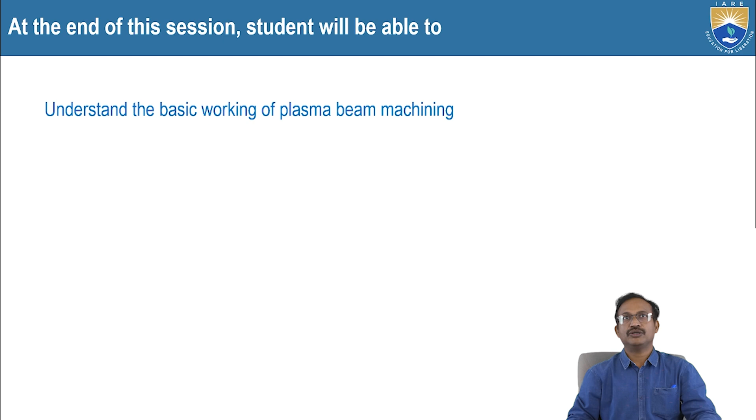Non-traditional machining processes have three branches under which there are different machining processes: the first one is mechanical, second is thermal, and third is chemical and electrochemical.

Under mechanical: ultrasonic machining, water jet machining, abrasive water jet machining, ice jet machining. Under chemical and electrochemical: chemical milling, photochemical milling, electrochemical milling.

Under thermal: electro discharge machining, electron beam machining, laser beam machining, ion beam machining, plasma beam machining.

Now we are in plasma beam machining.

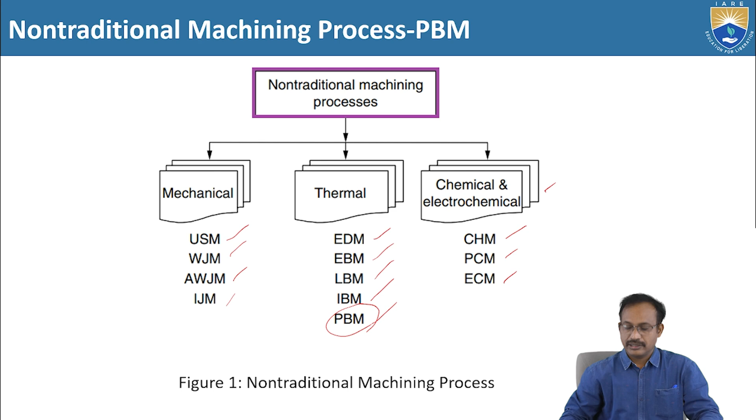Introduction to plasma beam machining. When the temperature of a gas is raised to about 2000 degrees centigrade, the gas molecules become dissociated into separate atoms. At higher temperatures, around 30,000 degrees centigrade, these atoms become ionized.

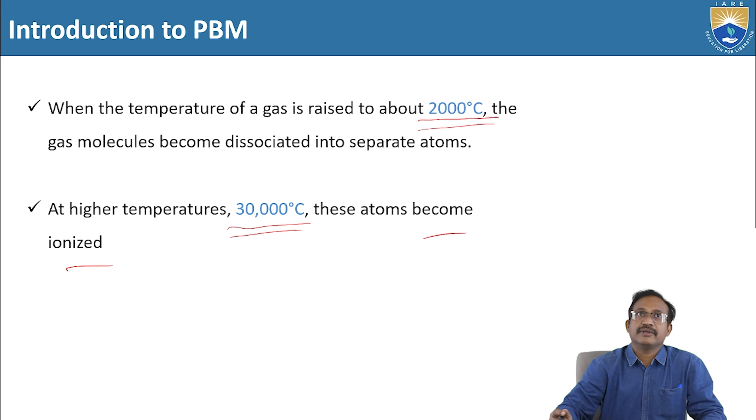The gas in this stage is termed plasma. So at 30,000 degrees centigrade, the gas molecules or atoms convert into ionization, and that is said to be plasma.

Machining by plasma was adopted in the early 1950s as an alternative method for oxy-gas flame cutting of materials like stainless steel, aluminium, and other non-ferrous metals.

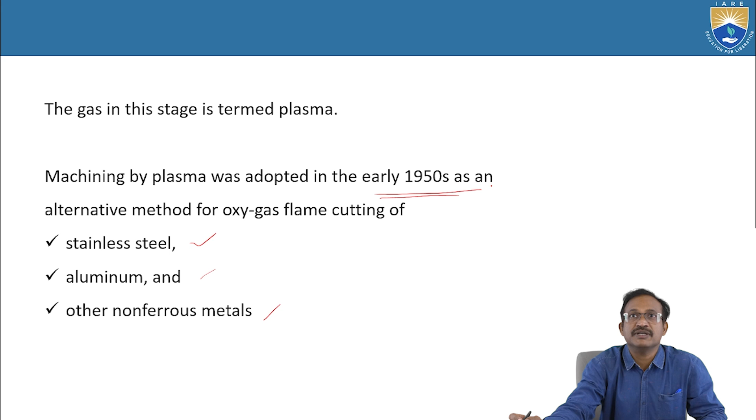During that time, the process limitations were low cutting speed, poor machining quality, and unreliable equipment.

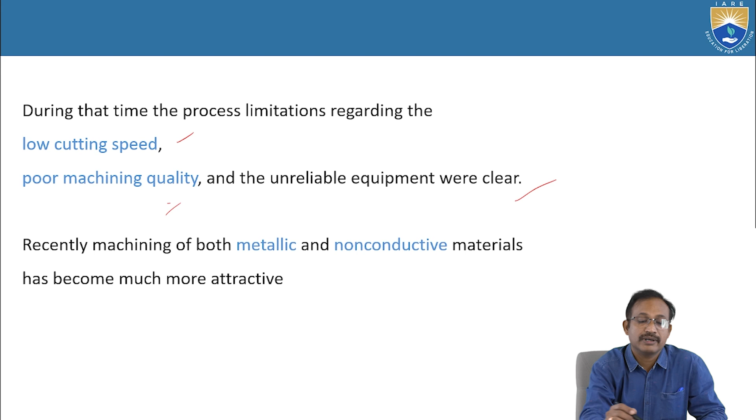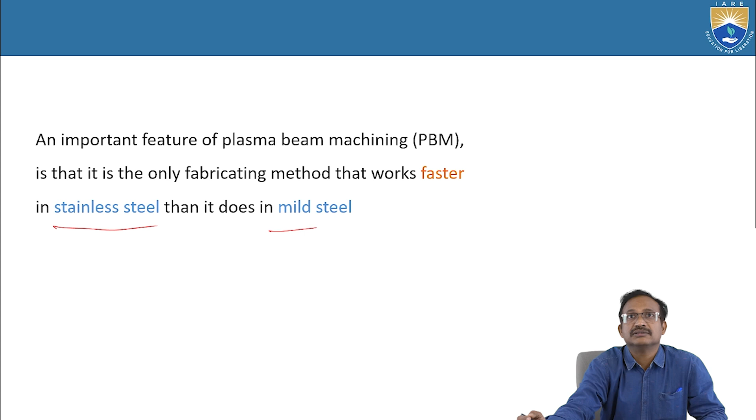Recently, machining of both metallic and non-conductive materials has become much more attractive. An important feature of plasma beam machining is that it is the only fabricating method that works faster in stainless steel than it does in mild steel.

Introduction to machining systems. In plasma machining, a continuous arc is generated between a hot tungsten cathode and the water-cooled copper anode.

A gas is introduced around the cathode and flows through the anode. The temperature in the narrow orifice around the cathode reaches 28,000 degrees centigrade, which is enough to produce a high temperature plasma arc.

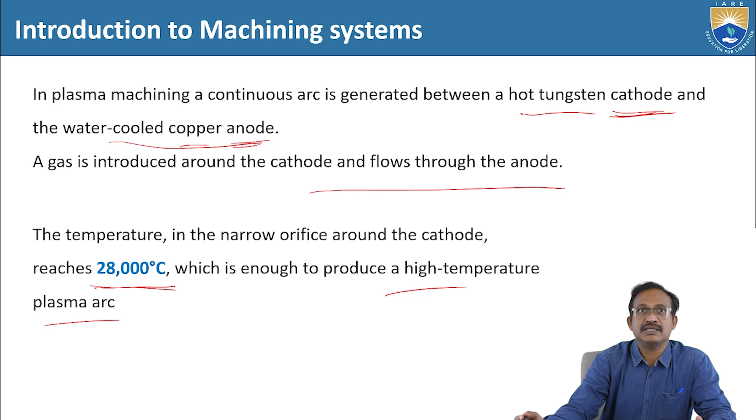This content about the operating temperature is very important. Here, the cathode material is tungsten and the anode material is copper - these two are the important elements in this plasma beam machining system.

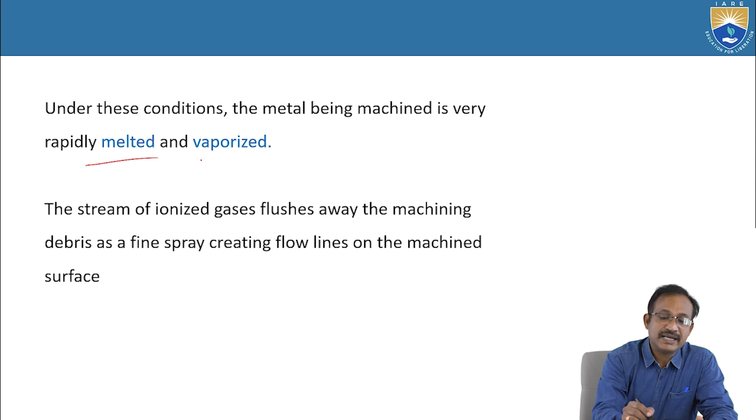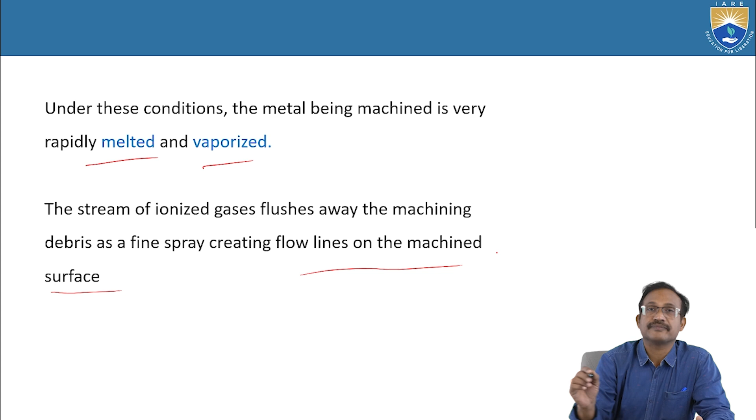Under these conditions, the metal being machined is very rapidly melted and vaporized - so the phenomena of material removal here is melting and vaporization. The stream of ionized gases flushes away the machining debris as a fine spray, creating flow lines on the machined surface.

Plasma beam machining characteristics: the removal rates by this method are substantially higher than those of conventional single point turning operations. Now let us look at these characteristics of plasma beam machining.

Parameters and levels: velocity of plasma jet is 500 meters per second. Material removal rate is 150 cubic centimeters per minute. Specific energy is 100 watts per cubic centimeter per minute. Power range is 2 to 200 kilowatts.

Voltage is 30 to 250 volts. Current up to 600 amperes. Machining speed is 0.1 to 7.5 meters per minute. Maximum plate thickness is 200 millimeters.

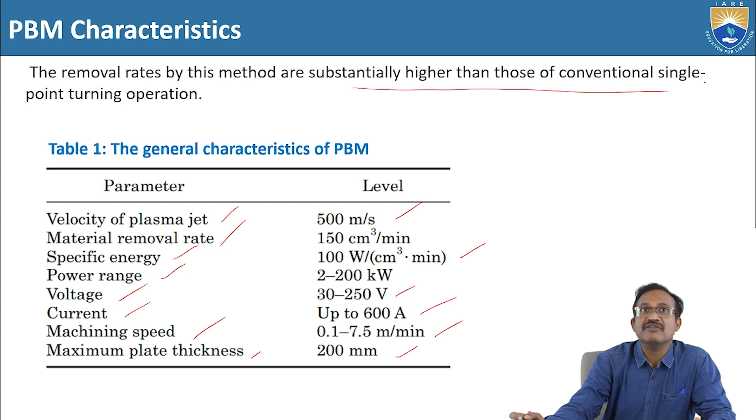So the removal rates by this method are substantially higher than those of conventional single point turning operations.

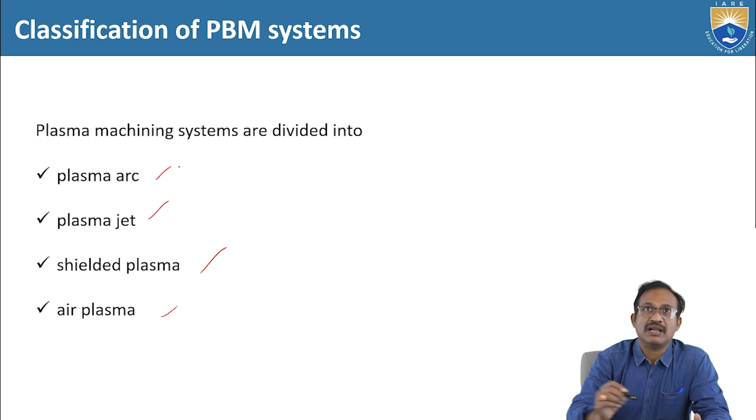Classification of plasma beam machining systems: plasma machining systems are divided into plasma arc, plasma jet, shielded plasma, and air plasma.

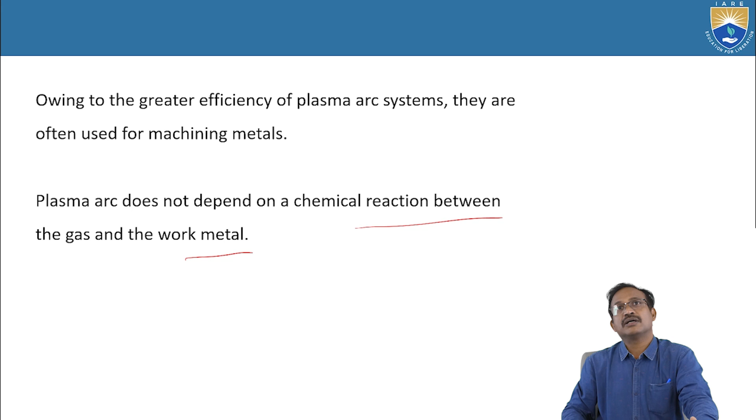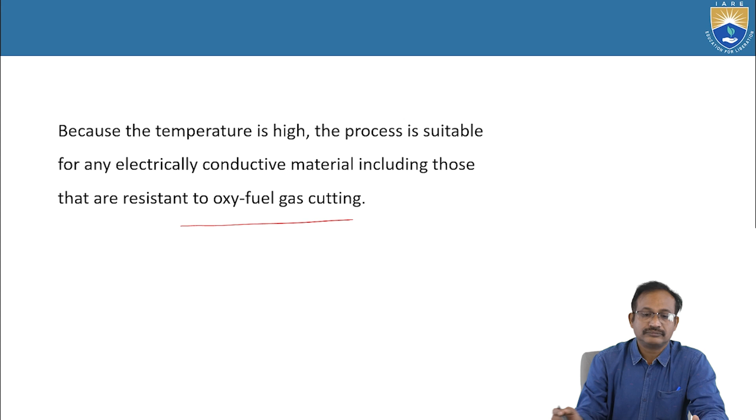Owing to the greater efficiency of plasma arc systems, they are often used for machining metals. Plasma arc does not depend on a chemical reaction between the gas and the work metal, because the temperature is so high. The process is suitable for any electrically conductive material, including those resistant to oxy-fuel gas cutting.

Now the second system is plasma jet. In this system, shown in figure 3, the non-transferred arc operates within the torch itself.

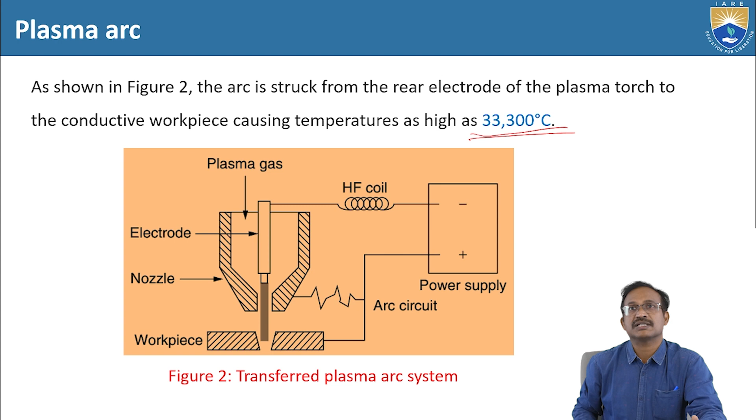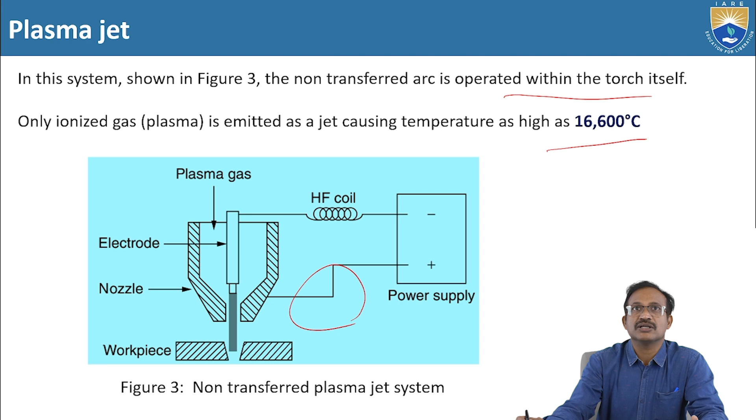Only ionized gas, that is plasma, is emitted as a jet causing temperatures as high as 16,600 degrees centigrade. The difference here is that we do not have the arc circuit connected to the workpiece like in plasma arc setup. That is eliminated. Directly it is connected to the setup. That is the only difference.

Since the torch itself is the anode, a large part of the anode heat is extracted by the cooling water and is not effectively used in the material removal process.

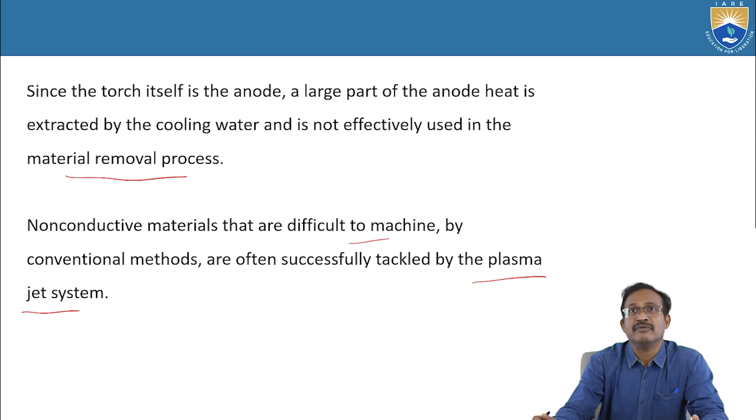Non-conductive materials that are difficult to machine by conventional methods are often successfully tackled by the plasma jet system, since usually non-conductive materials are very difficult to machine.

Next, shielded plasma. In this, gas shielded plasma and water shielded plasma are the two types.

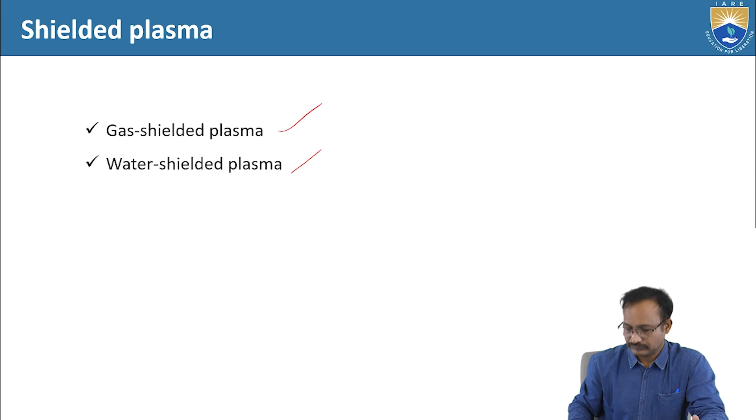Now let us discuss gas shielded plasma. When machining different materials such as aluminum, stainless steel, mild steel, assisting gases may have to be used in order to produce cuts of acceptable quality. In such a case, an outer shield of gas is added around the nozzle to reduce the effect of the atmosphere on the machining gas, usually nitrogen or argon.

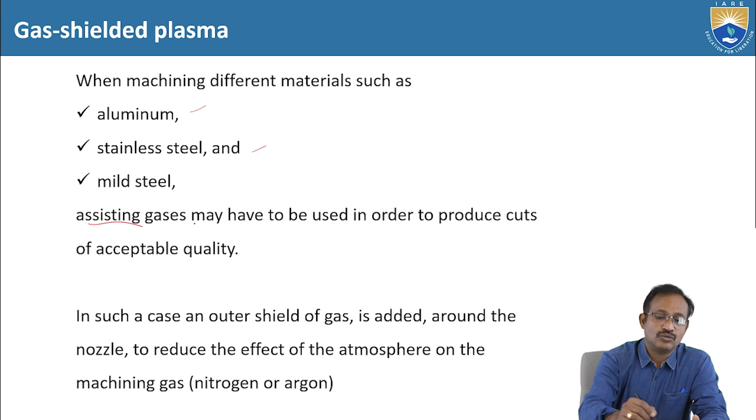The shielding gas depends on the metal being machined. Based on the metal itself, we have to choose the shielding gas.

For stainless steel, aluminum, and other non-ferrous metals, hydrogen is often used as a shielding gas.

CO2, carbon dioxide, is popular for ferrous and non-ferrous metals.

For mild steels, air or oxygen may be used. So for mild steel, we can go with free air or oxygen, but for stainless steel, hydrogen, and for ferrous and non-ferrous metals, carbon dioxide.

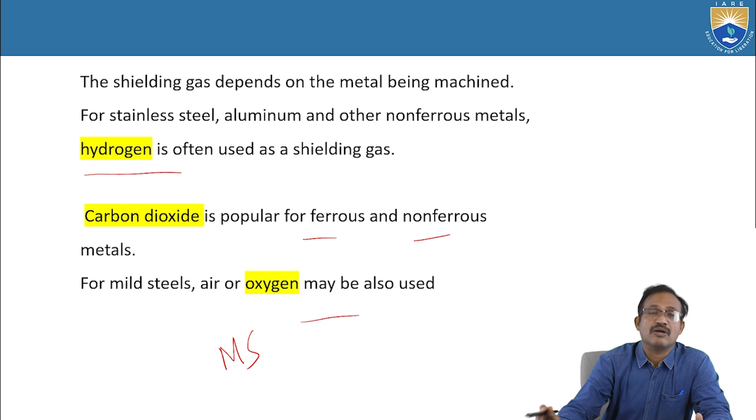Water shielded plasma. In figure 4, nitrogen is used for machining while the shielding gas is replaced by water.

Water forms a radial jacket around the plasma torch. Let us go through the water shielded plasma figure here: anode workpiece, scrap side, used side, plasma torch, water curtain circulated around the jacket, water supply, and the plasma gas passing through these nozzles.

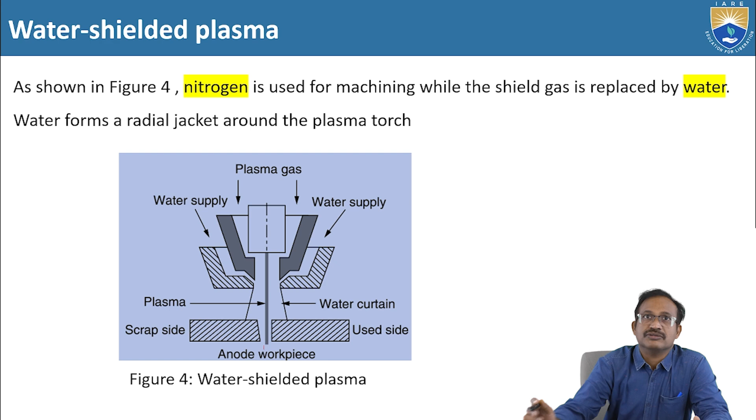The cooling effect of water is reported to reduce the width of the cutting zone and improve the quality of cut. So here cooling of water plays a predominant role in the quality of the machining.

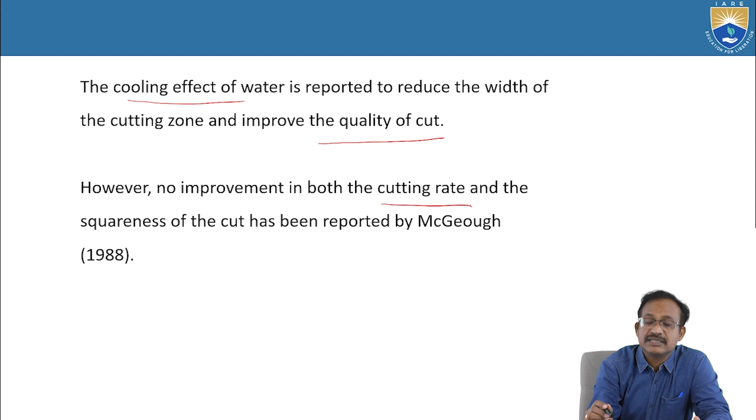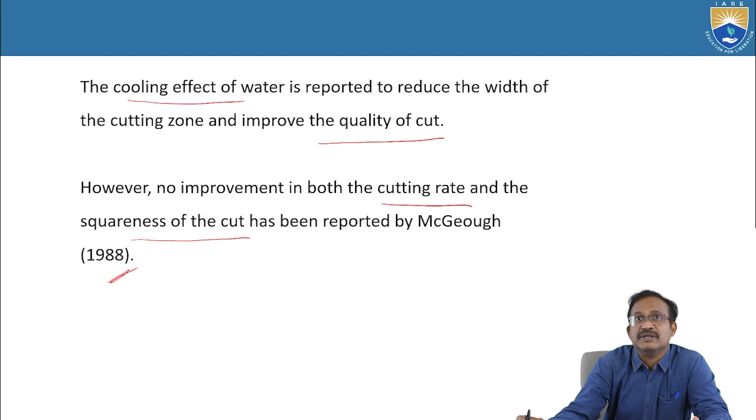However, no improvement in both the cutting rate and the squareness of the cut has been reported by McGeough during 1988. McGeough investigated that there is no improvement in both the cutting rate and the squareness of the cut.

Air plasma. Compressed air is used as the machining gas instead of nitrogen or argon.

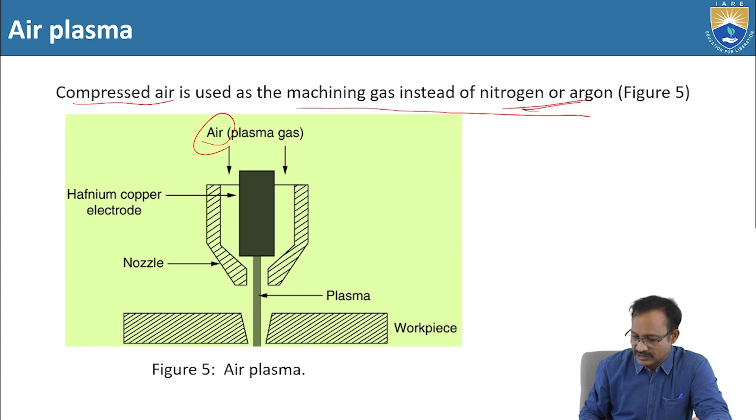See here, air is passing as the plasma gas, with hafnium copper electrode nozzle, plasma workpiece setup. Compressed air is used as the machining gas instead of nitrogen or argon. In air plasma, we are replacing the nitrogen or argon with compressed air. That is the only difference; the rest of the things are the same.

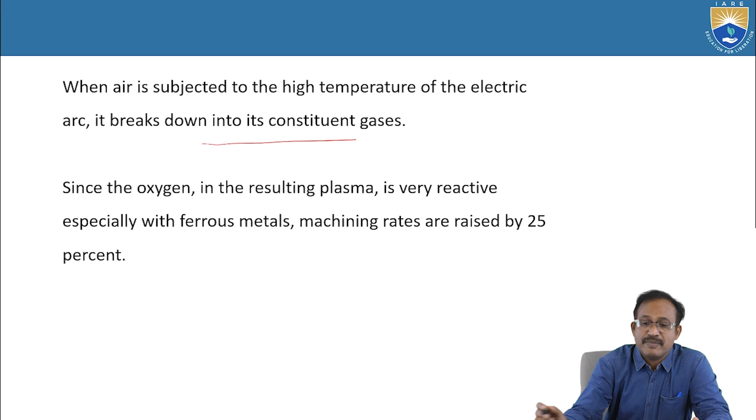When air is subjected to the high temperature of the electric arc, it breaks down into its constituent gases. Since the oxygen in the resulting plasma is very reactive, especially with ferrous metals, machining rates are raised by 25% because of the reaction.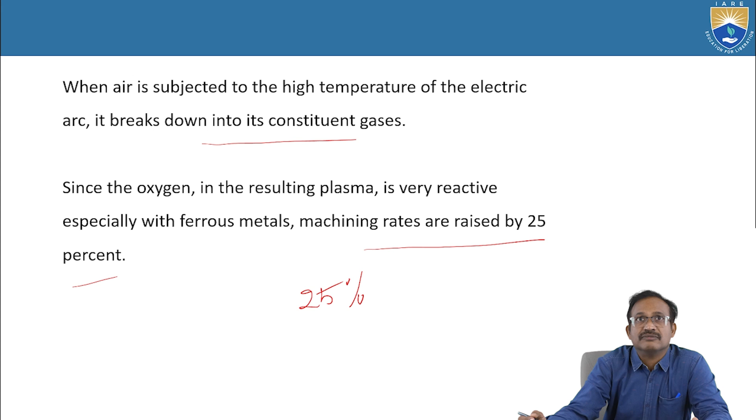The main drawback of this method is the heavily oxidized surface, which is frequently obtained in case of stainless steel and aluminum. Because tungsten is reactive with oxygen, hafnium copper (Hf–Cu) or hafnium zirconium (Hf–Zr) alloys also replace tungsten electrodes.

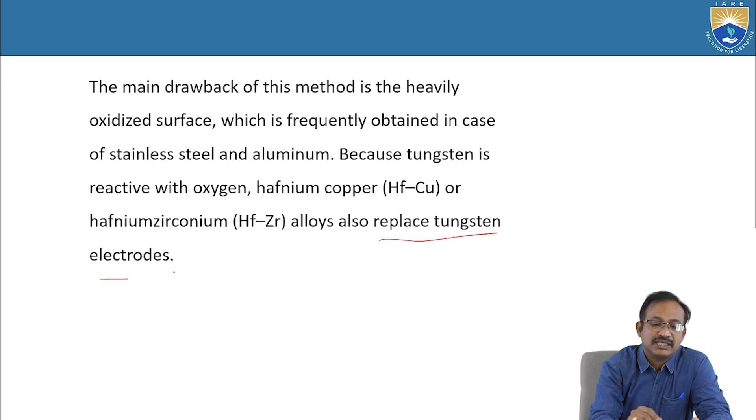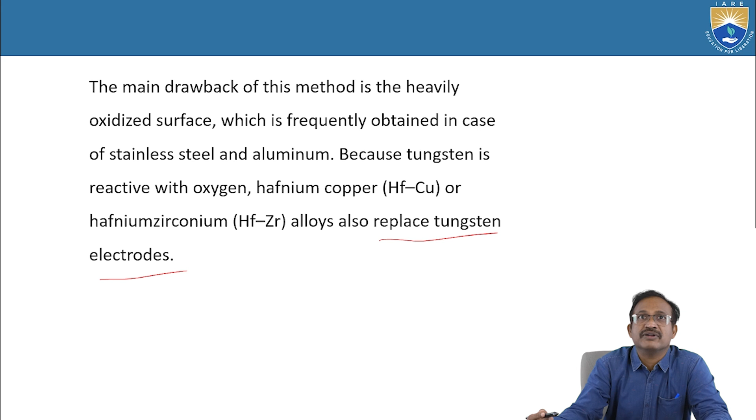Usually we use tungsten electrodes, but in order to overcome the reaction with oxygen, we use Hf–Cu (hafnium copper) and Hf–Zr (hafnium zirconium), since oxides will damage the workpiece. So instead of tungsten, we have to go with either hafnium copper or hafnium zirconium. However, the life of these electrodes becomes shorter.

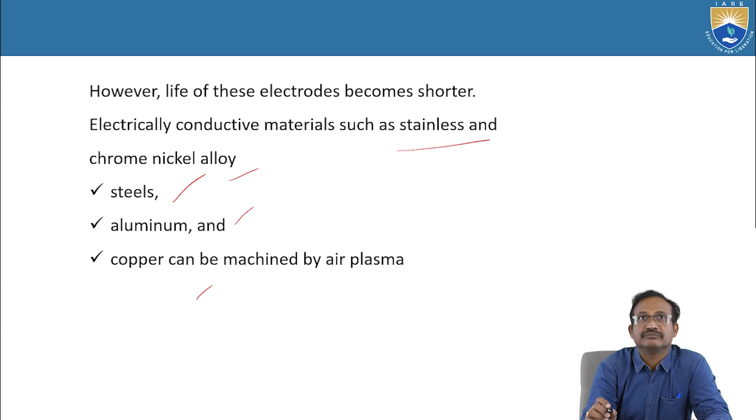Electrically conductive materials such as stainless steel, chrome nickel alloy steels, aluminum, and copper can be machined by air plasma.

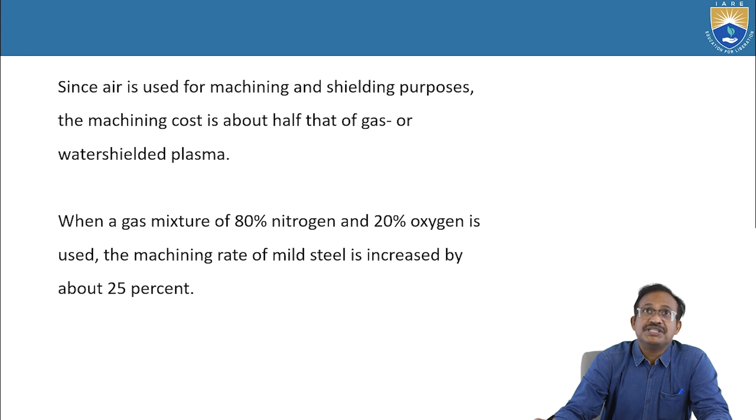Since air is used for machining and shielding purposes, the machining cost is about half that of gas or water shielded plasma. So there is about 50% cost reduction, and obviously we can go with air.